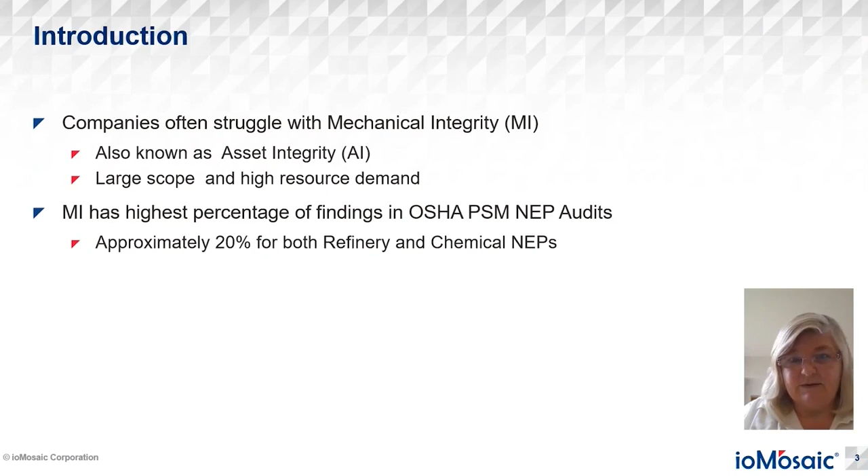So, if you think about it, a process has a multitude of equipment, piping, instruments, even something as simple as a storage tank system. You can have a tank, maybe a couple of pumps, say 3 pipelines, at least 1 vent, probably 3 instrument loops, maybe some switches that are tied into interlock systems, maybe some electronic gauges, as well as your containment system. So that's just a simple storage tank.

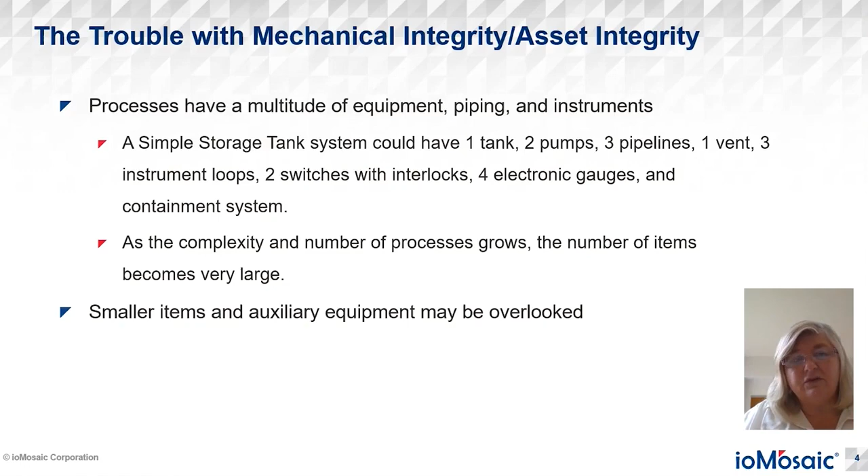As the complexity and the number of the processes grow, the number of items just becomes exponentially large. And in that context, you can see how smaller items and auxiliary equipment could be overlooked. So we're going to use 3 incidents, as I mentioned earlier. These come from the airline, chemical, and refining industries to illustrate what happens when small, seemingly insignificant items get overlooked.

The first one we're going to look at is from the airline industry. This was a Boeing 737 engine compressor bleed air 5th stage check valve failure, and there was actually an airworthiness directive issued in response to this. The following items come from the Chemical Safety Board reports. The first one will be the MGPI Processing fill line dust cap lock ring failure. And the final one is an unidentified dead leg that led to a propane release and fire.

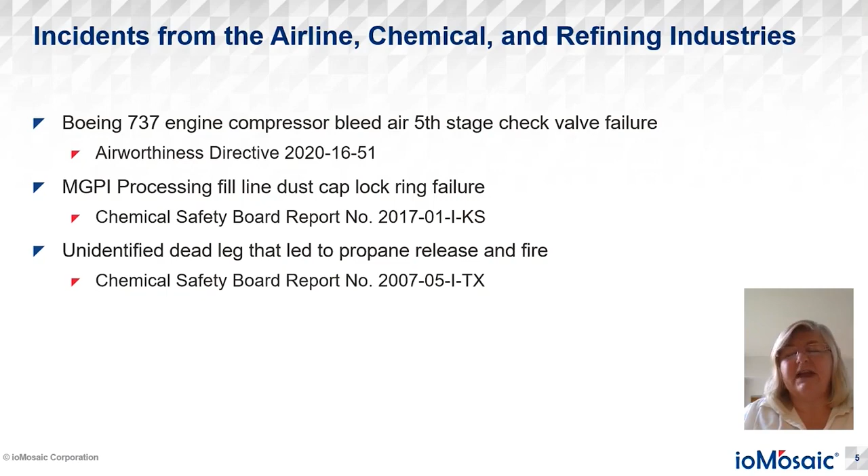So you see that these 3 are very different, even just looking at a brief description. So let's start with the Boeing 737 engine bleed air 5th stage check valve. In early 2020, about the time all the COVID lockdowns started, there were 4 incidents of certain Boeing 737 models with single engine shutdowns. These are planes that have dual engines, and one of the engines shut down. This was alarming, and an investigation identified the following key factors.

First, the planes were in long-term storage. For an airplane, being in storage 7 days or more counts as long-term storage. And when they looked at that specific 5th stage check valve, they identified that in every case it was corroded. That corrosion led to the valve sticking in an open position. The problem with that is the pilots lost the ability to control the bleed air, which leads to the engine losing power and the pilot can't restart it.

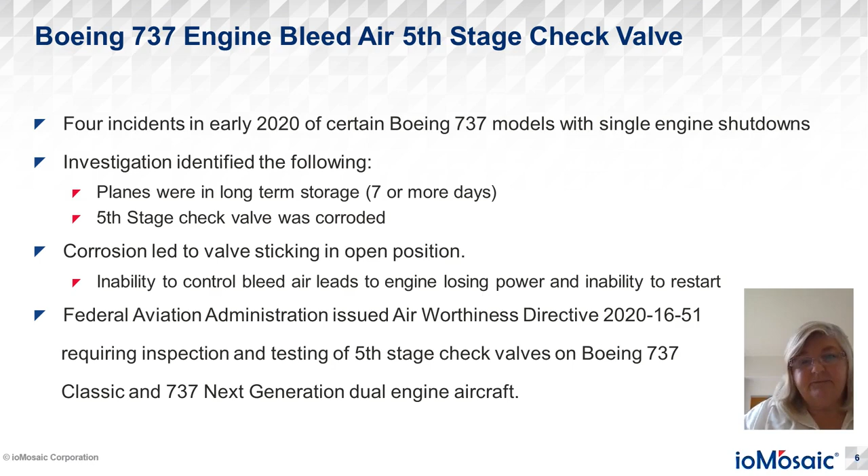So that led the Federal Aviation Administration to issue Airworthiness Directive 2020-16-51, which required the inspection and testing of the 5th stage check valves on all Boeing 737 Classic and 737 Next Generation dual engine aircraft. Prior to this, there had been no requirement to inspect and test these check valves.

Now, the reason these caps were installed was not for a safety reason. They were installed for a quality reason because they didn't want contaminants getting into the raw materials. But in fact, it acted as a safeguard for a loss of containment, even though it wasn't realized as such.

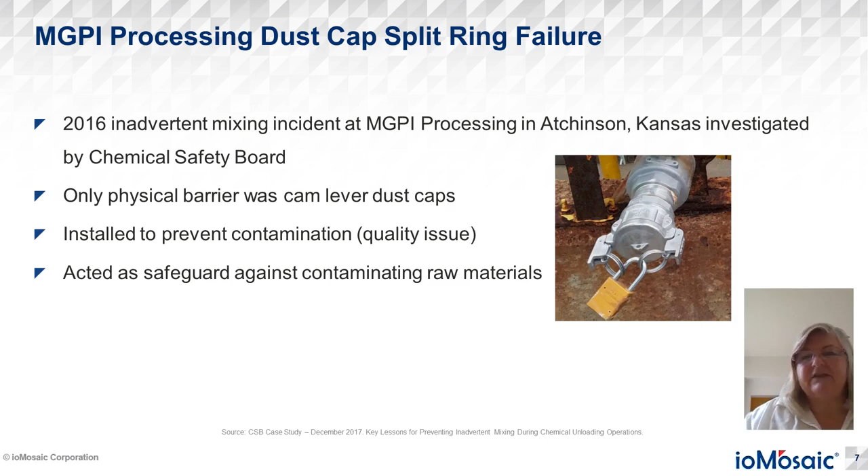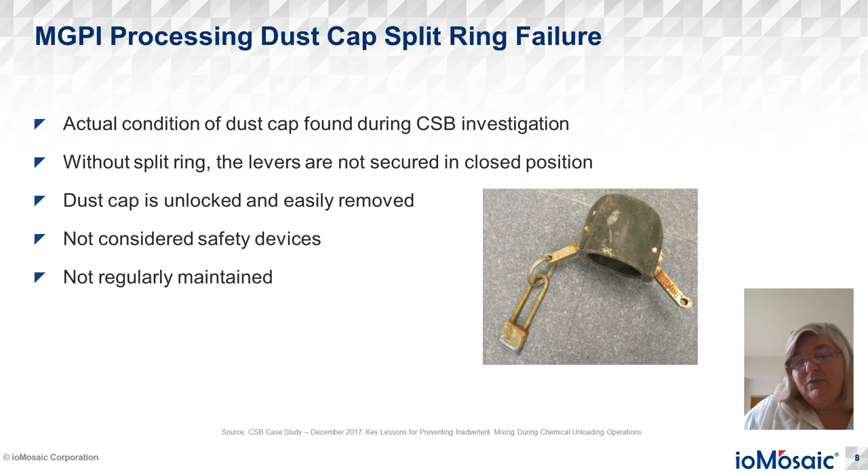So when the CSB did their investigation, they found dust caps lying around and on some of the lines at MGPI. And as you can see from the picture, a split ring is missing. There's a lock, but it's only on one side, which of course doesn't prevent the cap from being removed. So these are not really safety devices. They weren't considered as such. And because they weren't considered safety devices, they were not regularly maintained, inspected, or replaced.

And the last incident we will review is the Valero McKee refinery incident, and this is the unidentified dead legs. This is a slightly older incident from 2007, but the situation was there was a liquid propane release from cracked control station piping, which led to a massive fire with injuries to 3 employees and a contractor.

So it was a serious incident. Water had leaked by a block valve and collected in the dead leg. They had some unexpected cold temperature in the area of the Valero McKee refinery that led to that water that had leaked by the block valve freezing and forming ice. Well, when the ice formed, of course, it expands and it cracked the 10-inch elbow. When the ice melted, when the temperature rose above freezing, propane was released through that crack. And of course, it found an ignition source.

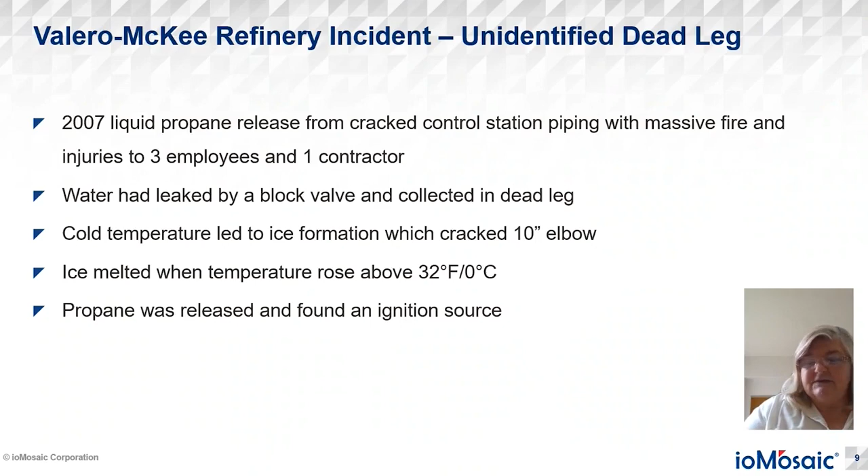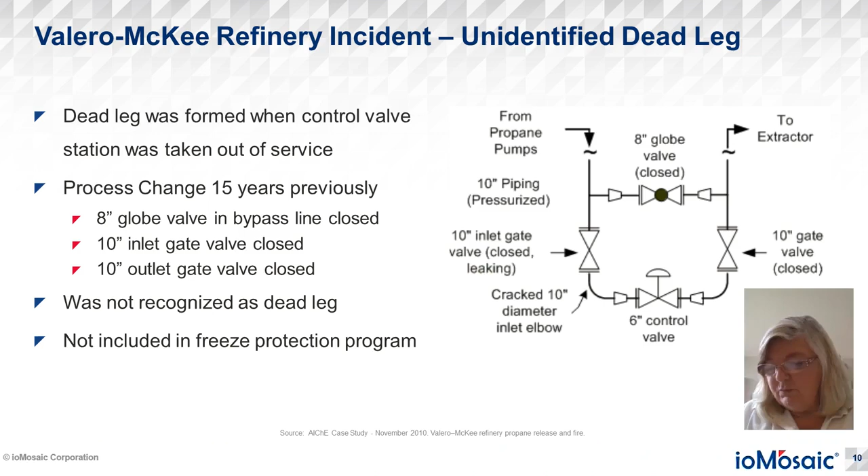So in all these cases, there were items that failed that originally were not included in any kind of an asset integrity system or preventative maintenance program. Now, how do you identify items to put in your system? Well, of course, the OSHA Process Safety Management Standard lists the major items like pressure vessels, storage tanks, piping, your relief and vent systems and devices, your emergency shutdown systems, controls, pumps, and things like that.

Now, piping systems can be especially difficult. Even the smallest site has lots and lots of piping and piping specialties included in that piping. Of course, RAGAGEP, or recognized and generally accepted good engineering practices, provide additional information on these things. However, as those incidents we looked at showed, those smaller items are often missed because they're not considered safety critical or they're just simply overlooked.

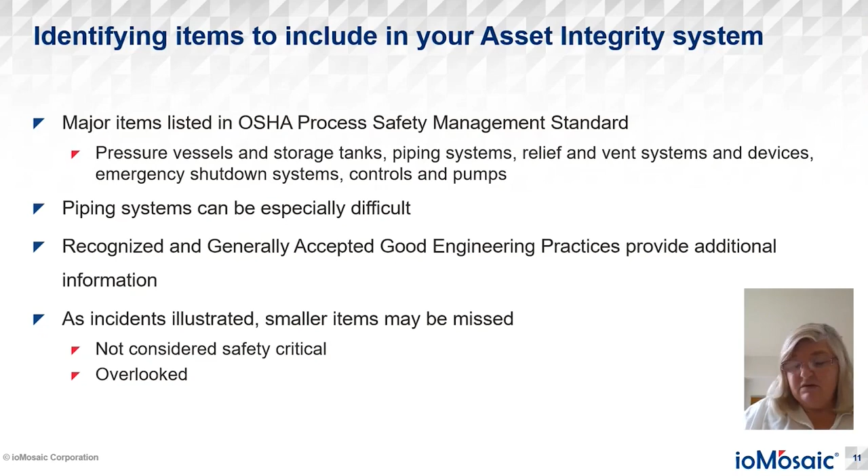Well, the first way you can identify items to include in your asset integrity system is to look at the safeguards that you have identified in your hazards assessments. And these not only include your PHAs or process hazards analyses, but also your layer of protection analyses, and they can even come from your job safety analyses. You want to also look at your incident and near miss reports. These may identify small items that failed or almost failed that should be in your AI system.

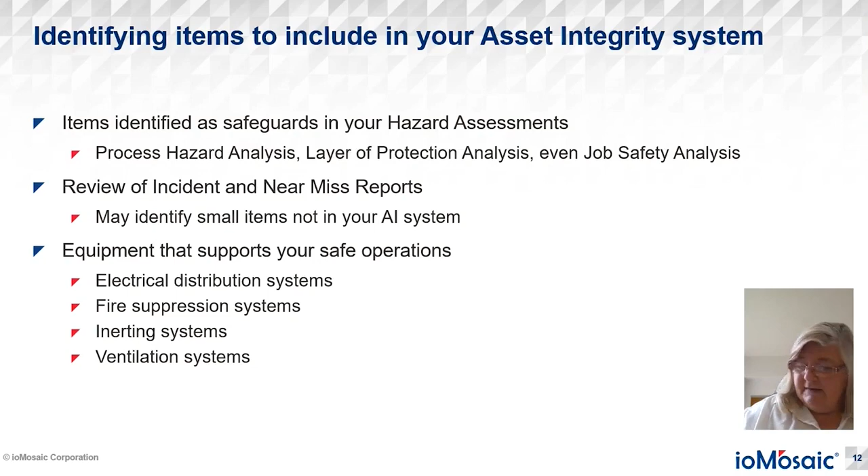And you also want to include equipment that supports your safe operations. These are things like your fire suppression systems, which definitely should be there. Inerting systems, if they're used to control the potential for ignition, especially in a flammable storage vessel. Ventilation systems, electrical distribution systems, and any other system that your site may have. Some systems that could be a refrigeration system.

Now, these are a few examples of small items that you may want to consider for your AI system. For pressure vessels and tanks, vent holes are usually included on your dip legs, and they should be unless there's a special reason not to. Those things can plug, so you want to include those in your PM plan for your vessel. Flame arresters, your nitrogen blankets that get to your inerting systems, pressure regulators, and even sight glasses.

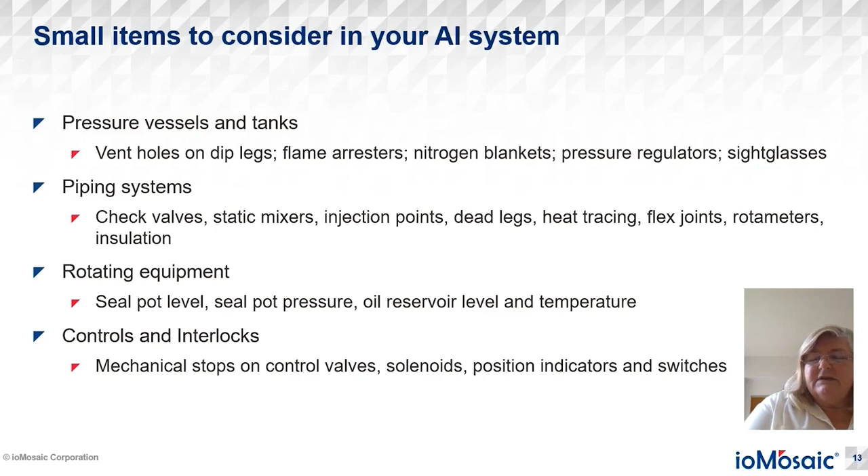For piping systems, just some examples of piping specialties that should and could be part of your system are check valves, static mixers, injection points, dead legs, like we just looked at, heat tracing, flex joints, rotameters, and insulation. All those are things that could perhaps lead one day to an incident. Rotating equipment includes your seal pot level, seal pot pressure, things like your oil reservoir and the temperature of that oil. And of course, controls and interlocks. Sometimes the mechanical stops on control valves aren't considered part of that, but they should be. Solenoids, position indicators, and switches are also things that can often be overlooked.

Now, this seems like a huge list of items, but many of the things, especially those that we just discussed, can be supported by your operations team. The first step is to define a list of specific items that the operations team can review. A lot of these can be taken care of during their walkthroughs. You want to develop procedures and documentation for these operations tasks, and you'll want to train them on the task. Especially, you want to make sure that you include in that training what to do if corrective action is needed. Sometimes it will take a work order to do a replacement or repair, but they need to be trained on that. And of course, all results should be documented and reviewed as part of your asset integrity system.

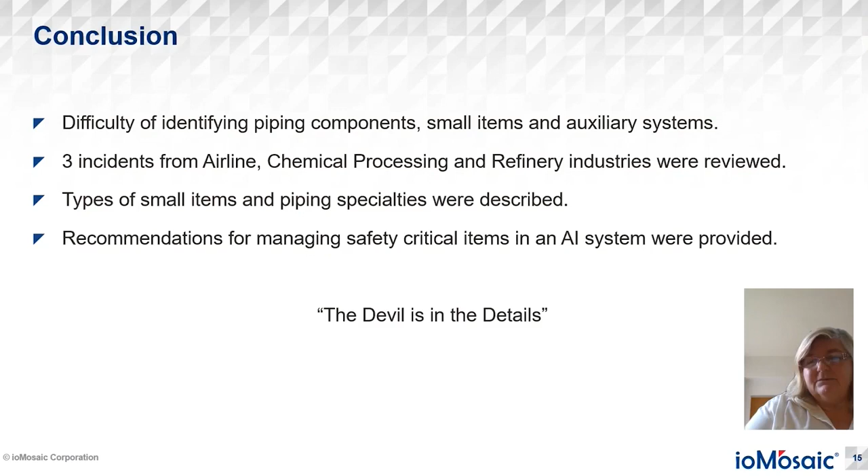There is difficulty in identifying piping components, especially small items and often overlooked auxiliary systems. We did review those 3 incidents from the airline, chemical processing, and refinery industries. We also took a look at some types of small items and piping specialties that may be included in your AI system. And finally, we looked at recommendations for managing safety critical items in an asset integrity system in the hope that these would be helpful. Remember, the devil is in the details.